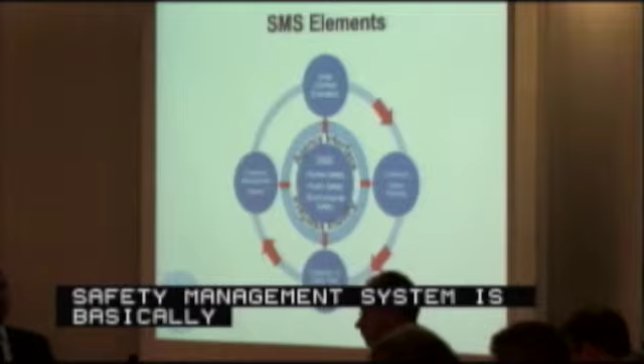The safety management system that we employ is basically a four-pronged approach in which we initiate the work at the contract evaluation stage, and we take it all through the life cycle, where we are continuously interfacing with the various elements.

The first one, contract evaluation: here we're looking at the contract plans to make sure that the safety functions - worker, public, and environment - are all covered, and we are reviewing that. We evaluate each plan, and then work is only started upon the acceptance of the plan provided. We have meetings with the contractor prior to that, review their plans, and we are proceeding only after that has been done.

The compliance criteria that we have in place is dictated by OSHA, EPA. We're looking at New York City DOT, New York City DEP, Buildings, Department of Sanitation, Fire, and New York State DEC. All of this is looked at as part of the safety compliance of the contractor.

The contractors normally have a plan to train. They have toolbox talks, safety committee development, the safety standards, and safety stand-downs in which they actually stop work and talk to their workers every so often. We've now instituted that they have to all do it rather than do it in reaction to an incident. In the past, they've done it reactively to an incident; now they're doing it continuously.

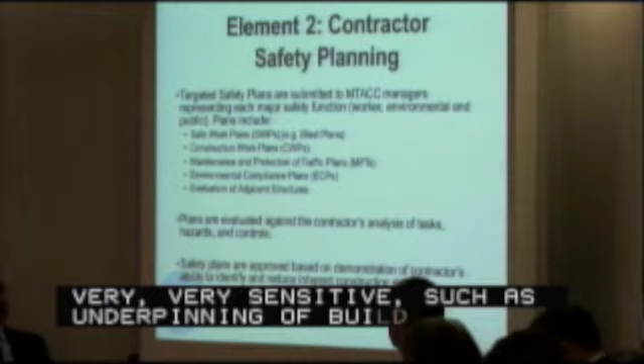We look at the maintenance and protection of traffic, because this is in the middle of the street and we need to make sure that the public is protected. We look at environmental compliance - air, noise, quality - and then evaluation of adjacent structures.

Particularly, we had to do that on 2nd Avenue, where in the first phase we had about 225 buildings that we actually needed to protect. These plans are evaluated against the contractor's tasks, and last but not least, we approve the plans before they proceed, making sure we identify various activities that will reduce the risks.

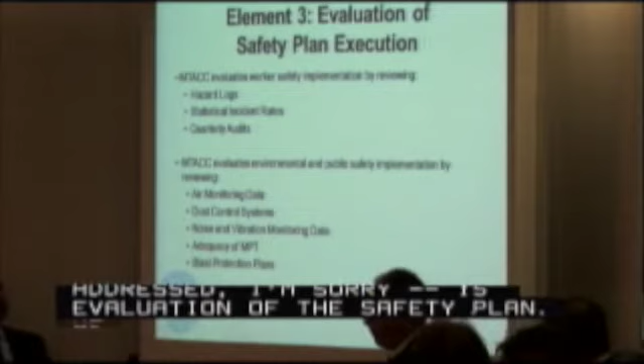The third item that needs to be addressed is the evaluation of the safety plan. Here we look at the execution, evaluating worker safety implementation, looking at hazard logs and statistical incident rates. We do quarterly audits, and above all we monitor air quality, dust control systems, vibrations, and the adequacy of the maintenance and protection of traffic.

The fourth element is contractor management. We review and evaluate their operation, and provide feedback to construction management personnel in order to effect change. A lot of it has to do with feedback from lessons learned. This is one of the first times we built in such a dense urban area, and we needed to be able to do that. Here's an example.

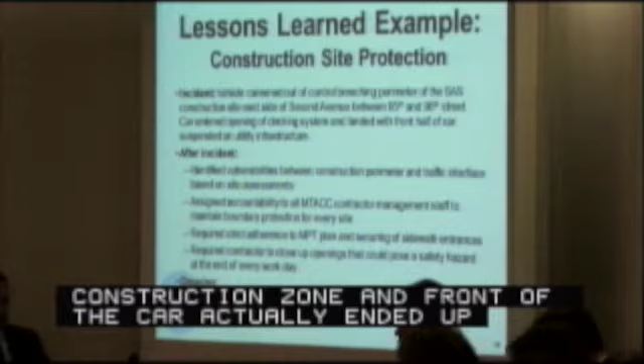Last summer we had a vehicle that was hit by another vehicle and pushed through our construction zone. The front of the car ended up suspended in an opening that was left uncovered by the contractor. The MPT protection area is such that it will not prevent a car from actually striking through many times, so it's very important that any openings are covered.

We identified vulnerabilities after the incident and made the required changes in order to adhere to the MPT plan. So that's something we're doing continuously, to make sure we learn from incidents that happen so they will not repeat themselves.

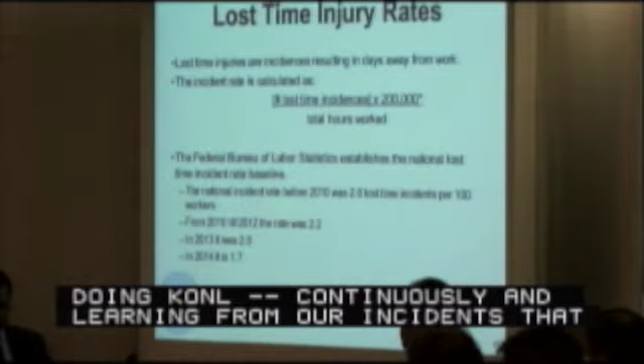One of the things we do is monitor lost time injury rates constantly. Before 2010 the national number was 2.5, 2.6. It went to 2.2, then in '13 to 2.0, and in 2014 it's now been lowered to 1.7.

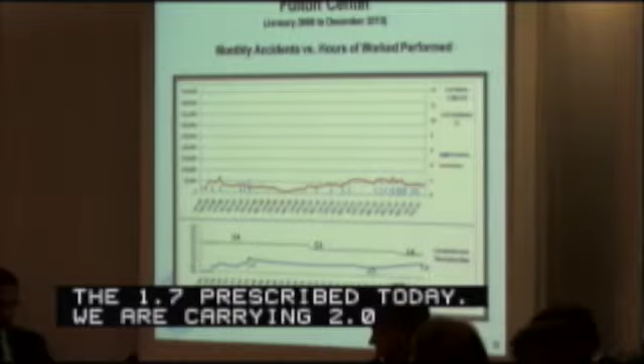Last but not least is Fulton Center, which is really low at 1.13, and that was throughout low. I want to make sure everyone understands this is a different type of construction — building construction versus the heavy civil construction we have for the others. That's also the reason for such low numbers, although they were very careful to monitor it.

That's about it. Any questions?

If I remember correctly, two years ago we had a major safety issue regarding a blasting situation on a contracting job. What rules were violated in that context, and what consequences took place as a result? The answer is all the rules were violated — there was not one rule that the contractor didn't violate. They went over everything they should have done.

This is the blast that happened at the northwest corner of 2nd Avenue and 72nd Street, where we were building an ancillary building. There was a blast that was supposed to be controlled, but it ended up being an explosion rather than a blast. We did an analysis at the time to understand exactly what happened, and we put in place stringent rules for that not to reoccur.

Not that we didn't have rules before, but the problem was the contractor took it upon themselves to go ahead and do something without the approval of the CM. The CM did not get involved to make sure that happened, and above all, the people charged with oversight from the fire department just did not react to that either. So the three things together resulted in what happened, and it shouldn't have happened.

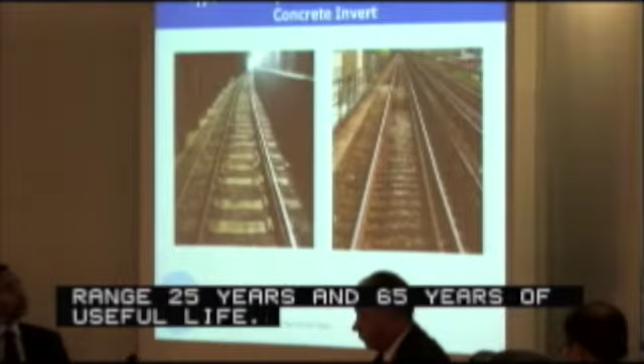The next 7 slides are pictures of the various types of track within the New York City Transit system. There are approximately 90 miles of Type 1 ballasted track. There are 193 miles of Type 2 short tie blocks embedded in concrete invert track.

There are approximately 175 miles of Type 2 modified, or Type 2M, short tie blocks and long ties embedded in concrete invert. There are 167 miles of Type 3 elevated track.

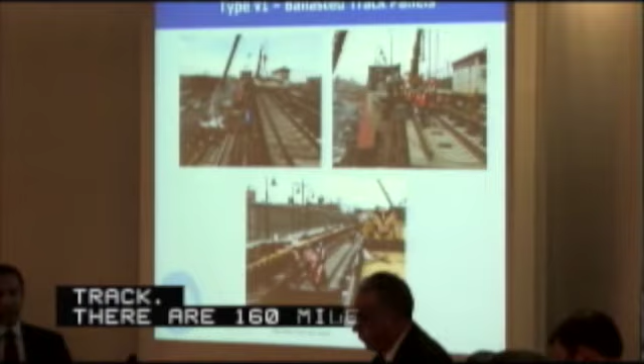There are 160 miles of Type 6 ballasted track, which you'll find in the open cut sections like the Dyer line. There are 13 miles of Type 7 track, which is long ties resting in ballast used primarily in our yards. And there are 19 miles of Type 8M direct fixation track.

We have a comprehensive track and switch renewal program that is carried out using a dedicated in-house construction workforce who does the majority of our track work. One of the main benefits of using in-house forces is flexibility. Flexibility enables us to change locations based on track access availability. We are able to deploy workforces to gain efficiencies and productivity. In addition, we have our own on-site track and switch fabrication facility at Linden Yard in Brooklyn, New York.

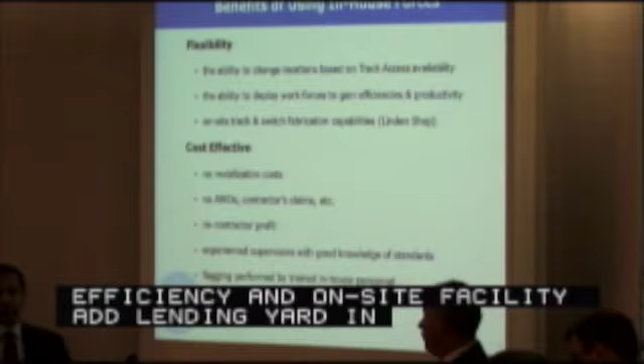Another benefit of using in-house forces is for cost effectiveness. There are no mobilization costs, AWOs, contractors' claims, or profit attained from the contractor. The in-house forces include experienced supervisors and managers with thorough knowledge of New York City Transit standards. In addition, flagging associated with the in-house capital work is performed by our own MOW trained personnel.

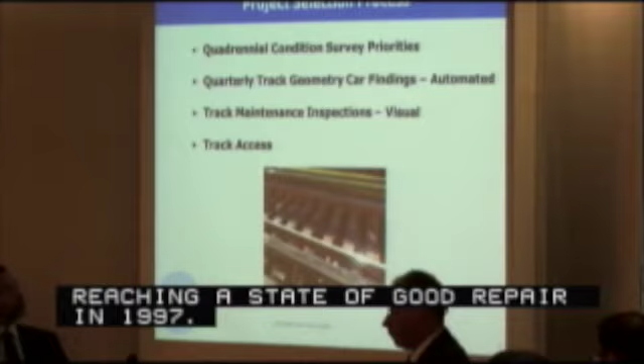Next slide. No, go back. Thank you.

The project selection process for the capital track and switch programs is based on the findings of the condition survey, track geometry car, visual inspections, and track access availability. The quadrennial condition survey is performed on mainline and yard tracks and switches. The purpose of this survey is to categorize track assets by their remaining useful life.

The quarterly track geometry car findings provide information on the track geometry, rail wear and flangeway width, rail flaws, thermal imaging, and video inspection. Both surveys and geometry car inspections are performed by our Track Engineering division.

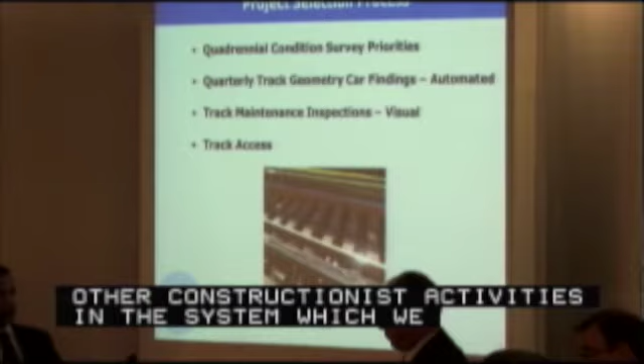Visual track maintenance inspection is performed by our in-house maintenance forces, by crews who walk and inspect the tracks on a system-wide basis twice a week on non-consecutive days. As for track access, we seek opportunities to coordinate our program with other planned construction activities in the system, known as piggybacking. The benefit of coordinating work results in cost efficiencies as well as minimizing customer inconvenience.

Could I ask how many track geometry cars Transit has? We have four.

And are they kept at different yards or all at the same yard? The oldest one is at... that's classified information. We keep them throughout the system.

The production levels for the 2010 to 2014 capital program include approximately 56 miles of mainline track, 126 mainline switches, yard work, and approximately 8 miles of continuous welded rail.

2014 is the final year of the current capital program. The 2014 capital program consists of 14 projects addressing approximately 7 miles of track reconstruction and 15 switches on the main line, approximately 2.5 miles of continuous welded rail, yard switches, with a revised budget of $207.9 million.

The cost estimates are provided by the Track Engineering Division, and to conform with standard procedures and ensure cost competitiveness, an independent engineering estimate is also performed. The estimate includes support costs such as diversions or general orders, work trains, and supplemental bus service.

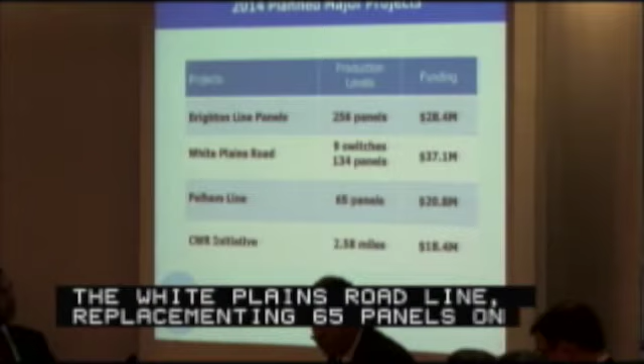Of the 14 projects planned in 2014, 4 of the largest projects are represented on this chart. They are the replacement of 256 panels on the Brighton line, replacement of 9 switches and 134 panels on the White Plains Road line, replacement of 65 panels on the Pelham line, and the installation of approximately 2.6 miles of continuous welded rail. These projects account for approximately $104.7 million, or half of the 2014 program budget.

You will note that for the 2015 to 2019 program, we proposed a CWR initiative program in order to address the high number of rail breaks. This will be discussed on the next slide.

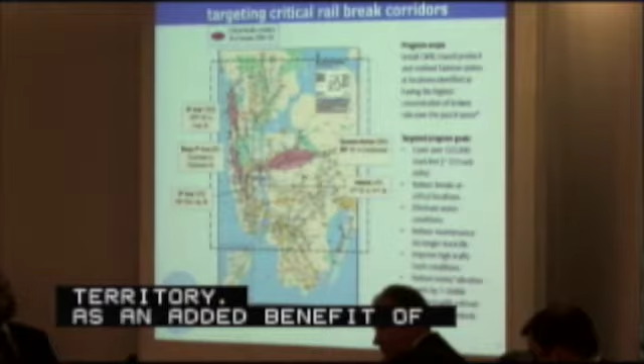We have proposed an increased CWR program. CWR has the lowest frequency of rail breaks per mile. Installation of CWR will significantly reduce joint failures found in bolted rail territory or bolt hole cracks. An added benefit of CWR is that it lowers noise and vibration levels. The installation of CWR and resilient fasteners also provides for a longer track life and reduction of stresses in the track structure.

The scope of the CWR initiative addresses critical corridors identified by Track Engineering, where the concentration of in-service rail breaks is highest, including the 8th Avenue corridor, Broadway 7th Avenue, 6th Avenue, Queens Archer, and the Astoria line.

Just as a note, CWR cannot be used on the structure due to the varying expansion and contraction differences of the actual rail and the structure itself. So on open deck structures, we do not use CWR.

As part of our new strategies, we have implemented a Scheduled Component Renewal Project, or SCRP. SCRP is a cost-effective approach utilized for track renewal in the subway and elevated track areas where fasteners and rails are failing. In most cases, the concrete and the cross ties still have years of remaining useful life.

The costs associated with the SCRP initiative are approximately 1/3 to 1/2 the cost associated with doing Type 2 or Type 3 reconstruction.

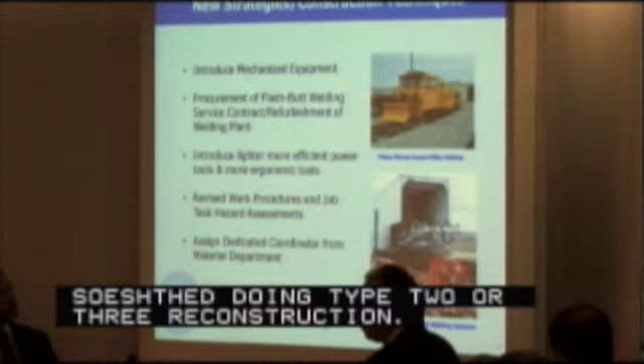To aid in our efforts in achieving our goals, we are exploring new strategies and construction techniques, such as the introduction of mechanized equipment to assist employees handling heavy materials, for example, a knuckle boom crane mounted onto a work train flat car, and a prime mover super utility vehicle.

We are in the process of exploring procuring a flash butt welding service contract, in addition to refurbishing the welding plant at Linden Yard in Brooklyn.

We are introducing lighter, more efficient power tools and more ergonomic type tools for our employees. We have revised work procedures and job task hazard assessments. In addition, the Material Department has assigned a dedicated coordinator to the Track Division to facilitate the material and procurement process.

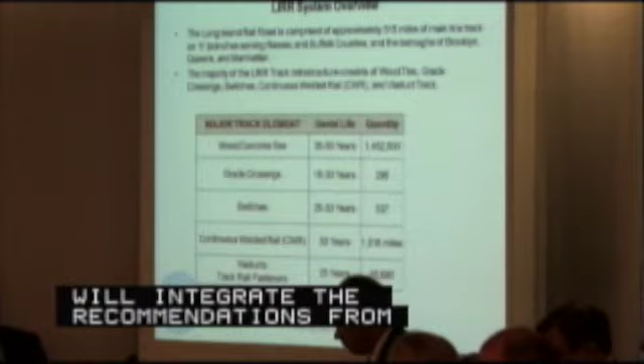Since its inception, the MTA capital program has made a $1.26 billion investment in Long Island Railroad's track program. This includes $51 million budgeted in our current 2014 annual track program.

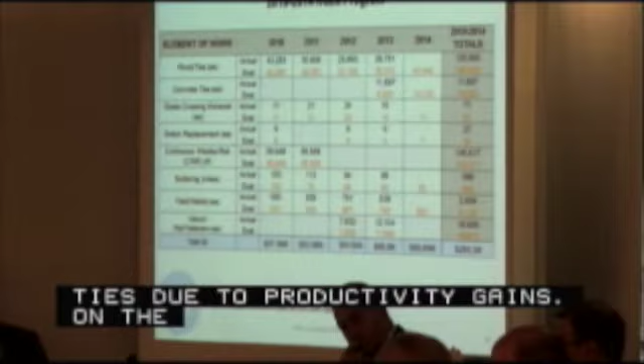Concrete ties: in 2013, we were able to install twice the amount of concrete ties due to productivity gains and available outages. On the CWR, continuous welded rail, the program goals for replacement of continuous welded rail we completed in the first 2 years of our program.

We are planning to replace another 160,000 linear feet, or roughly 30 miles, of CWR planned for in our 2015 to 2019 capital program. Over 95% of our track is CWR.

Field welds: each year we try to increase the goals for field welds in efforts to reduce the amount of bolted rail connections that we have. The viaduct rail fasteners: we also completed replacement of the original direct fixation rail fasteners on the Babylon Branch viaduct.

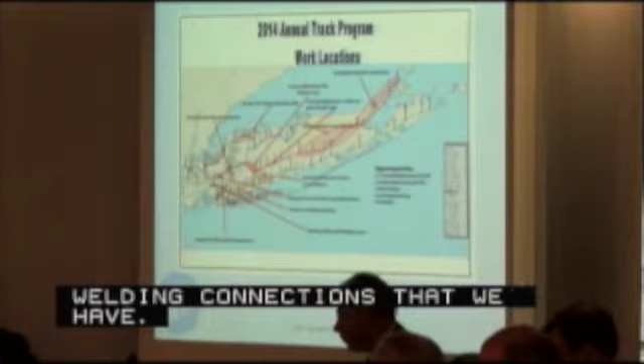Available track outages and contact time to do this work is carefully planned through our track outage program. Every effort is made to maximize the amount of work that can be done within an outage by piggybacking projects and consolidating work. When doing tie replacement on specific branches, we will also try to replace scheduled grade crossings, field welds, rail grinding, as well as replacement of track systems such as third rail, signal, and communications.

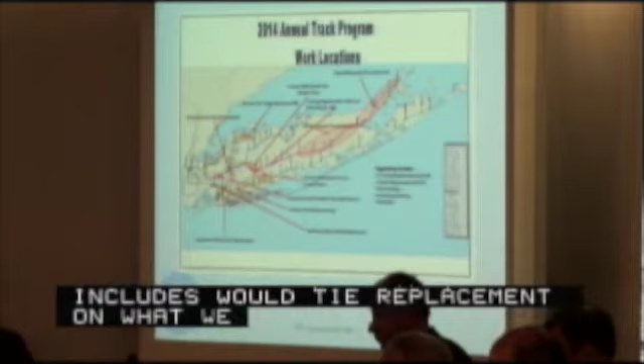The outages required to meet the goals shown for 2014 are illustrated on this system map, which includes wood tie replacement on what we call mechanized tie replacement, taking place between Ronkonkoma and Greenport on the Central Branch and between Divide and Farmingdale. Concrete tie installation will take place between Locust Manor and Oyster Bay, the Hempstead Branch, and other isolated locations.

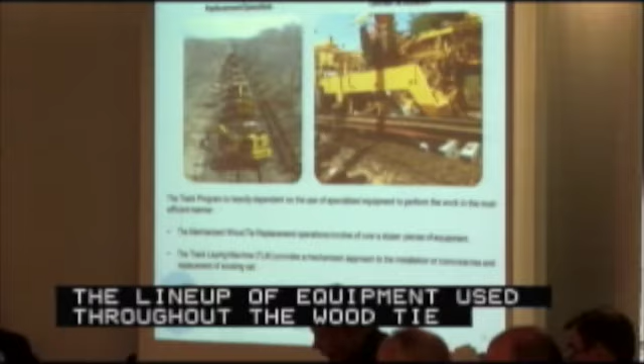The photo on your left represents the lineup of equipment used during our mechanized wood tie replacement operation, which involves over a dozen pieces of equipment. On the right is our track laying machine, which provides a mechanized approach to the installation of concrete ties and the replacement of existing rail.

Long Island Railroad has also used third-party supplied equipment such as shoulder ballast cleaners, rail ballast vacuums, and rail grinding machines when it's proven to be more efficient to do so.

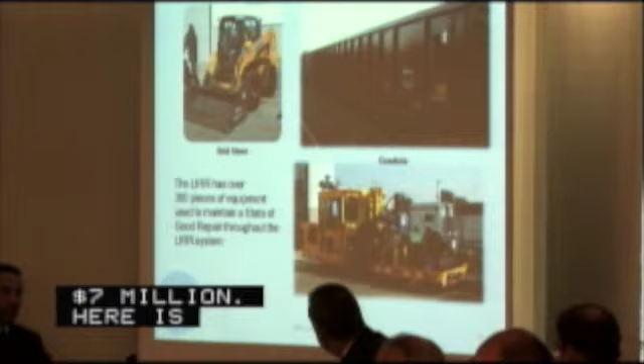The 2010-2014 track program also included the purchase of new equipment valued at $7 million. Here is some of the equipment recently purchased: skid steer, gondola, spiker. The railroad now has over 300 pieces of equipment used to maintain a state of good repair throughout our Long Island Railroad system.

What does a spiker do? It spikes. It spikes. It spikes, right. Drives spikes into the wood ties. Okay. Right.

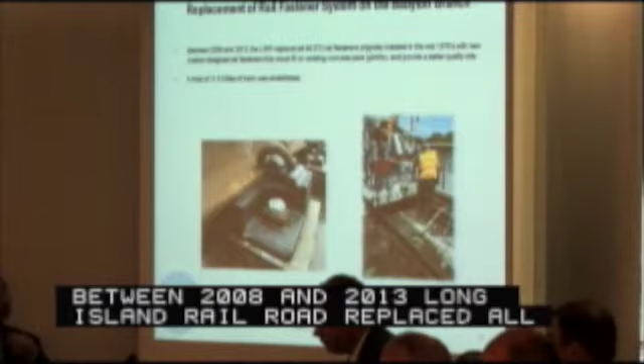Between 2008 and 2013, the Long Island Railroad replaced all 48,572 rail fasteners originally installed in the mid-1920s on the Babylon Branch Viaduct. The new rail fasteners were custom designed to fit onto the existing concrete pads. This eliminated the need for deck modifications while providing a better quality ride, improved electrical isolation, and adjusted the spring rate to lessen the impact of heavier equipment axles on our viaduct. A total of 11.5 miles of track was rehabilitated.

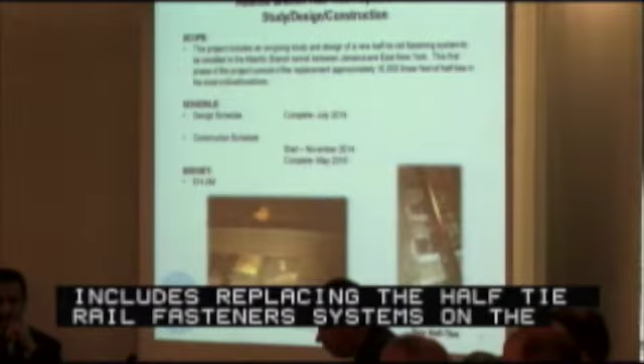Another state-of-the-art project includes the replacement of the existing half-tie rail fastener systems on the Atlantic Branch tunnel between Jamaica and East New York. The existing system will be replaced with a composite half-tie system that will allow the concrete substrate and drainage troughs to remain. The new composite tie is expected to have an increased useful life due to its resiliency against water and changes in temperature. The first phase is scheduled to start in November of this year, consisting of approximately 10,000 linear feet of half ties in the most critical locations, with completion scheduled for May 2016.

And that concludes our presentation.

Development of an enhanced track surfacing program is underway. 2 additional crews will be added to our surfacing program, and an enhanced joint elimination program has added 1 additional crew to eliminate joints by welding. The latest technology for detecting internal defects within the rail will be used by our contractor, Sperry Rail, who perform this measurement twice annually.

A complete reorganization of the track department includes several significant changes in oversight and management, such as track geometry being performed quarterly. TTCI will be performing 2 of these measurements in 2014. We are exploring the use of autonomous track geometry, where track geometry measuring equipment is added to the revenue fleet, and track conditions are constantly monitored. New technologies and automated inspection of joint bars, ties, and fasteners are also being explored and will be tested in 2014 by companies including Georgetown Rail and Sperry.

A manager will be dedicated to the oversight and data management of all the electronic information we'll be collecting. This information will be the basis for development of future track programs.

A quality assurance function for track inspections and the construction and maintenance of track is being developed, ensuring compliance to FRA and Metro-North standards.

Development will begin this year of a comprehensive track asset database to include electronic track inspections, trouble reporting, documentation of incidents, and corrective actions being implemented.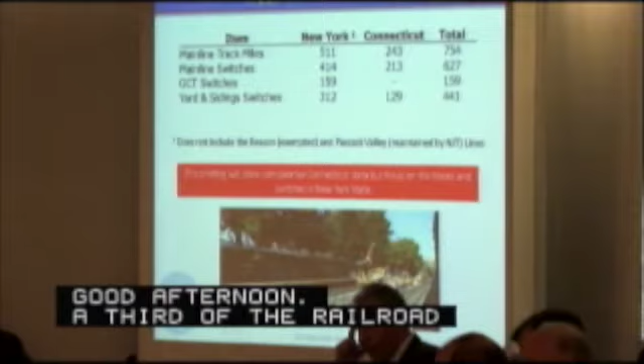I'll start by mentioning that about one-third of our railroad lies in Connecticut. Though this briefing is about our program in New York, I will occasionally mention Connecticut for comparative purposes. If you look at the chart, approximately one-third of our trackage is in Connecticut, two-thirds in New York. This does not include the exempted Beacon line. Beacon means we run no service there right now — it's basically a mothballed line.

Next slide. Our rail track values are the same as those of Long Island Railroad and New York City Transit. I'd like to point out, on the ballasted track for concrete ties, we — MBTA and Amtrak — did go in and buy some ties from a company called Rocla about 10 years ago. The ties had some manufacturing defects and they're failing on us now. We're replacing them under a special court deal with the company.

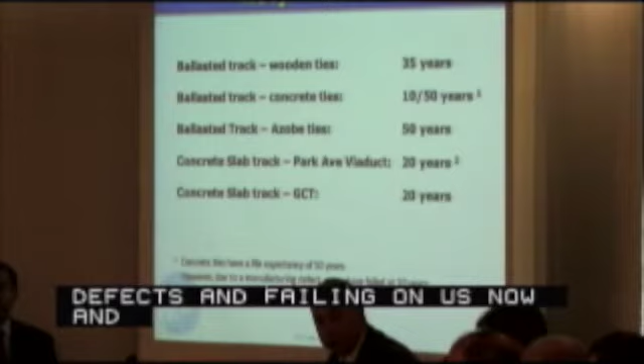Otherwise, the concrete tie track is designated to last for 50 years. On the concrete slab track on Park Avenue Viaduct, the viaduct itself is good for 100 years. The mounting system is also very robust, but the grouting system underneath, which levels out the rails, is experiencing some problems right now. We're working with the manufacturer to come up with a better grouting system, and that's what holds the time frame down to 20 years. Next slide.

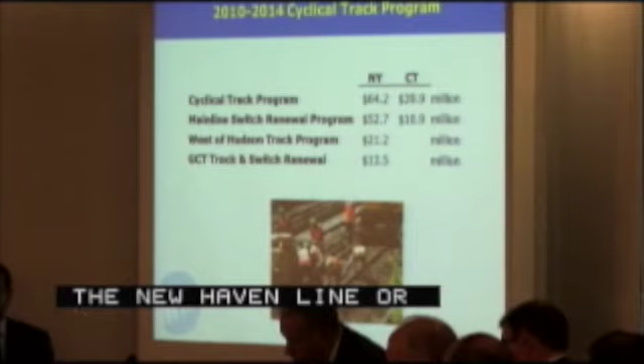Going back to one-third track in Connecticut and two-thirds track — I'm sorry, one-third track in Connecticut, two-thirds track in New York — is that just the New Haven line or is that all of Metro-North? That's in Connecticut. It's the New Haven line in Connecticut, sir, counting all the branches. And then for the rest of Metro-North, is all the rest of Metro-North, to include West of Hudson? Okay, so in total, one-third in Connecticut, two-thirds in New York. Yes, approximately. Thank you.

These figures indicate how much we have spent so far in this capital program and are going to spend this year. The breakdown is on the left-hand side: in New York, 75%, 25% in Connecticut, for a total of $200 million.

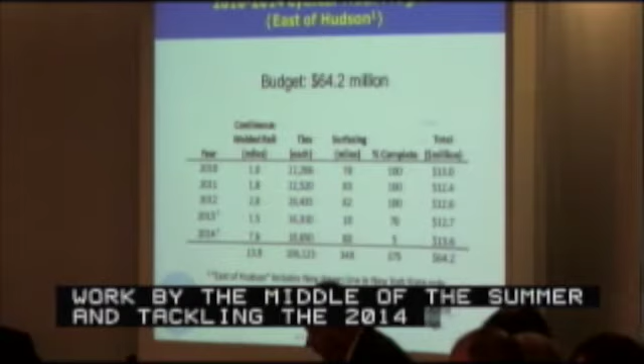Next slide. On this slide, please note that we include the New Haven line in New York State only; I will show you New Haven line data on a Connecticut slide on the following slide. The 2013 program execution was delayed by our response actions to several incidents and to our addressing of drainage issues last year. We are going to complete the 2013 work by the middle of this summer, and then we will tackle the 2014 program in late summer and fall of this year, weather dependent. So you notice the 70% in the percent-complete column — that's as far as we got from 2013 before we switched our focus. Next slide.

Looking closer at this year, 2014, we're looking at the cyclical track program. Excuse me — looking at Connecticut over here, this slide presents Connecticut data.

Connecticut projects in the program this year are one to two years out. Connecticut funds their program approximately one year at a time, during the year of execution. What happened in 2013 is that we diverted some of our forces working in Connecticut down to the problems they were having with drainage issues and construction at CP 109 in the Bronx — I'll cover those later in this briefing. That means we only completed 48% of our projects in Connecticut. This year we will catch up in Connecticut, completing the 2013 work and then the 2014 work. As of right now, half of the Connecticut program is funded for this year, and we expect the rest of the funding to show up later this year.

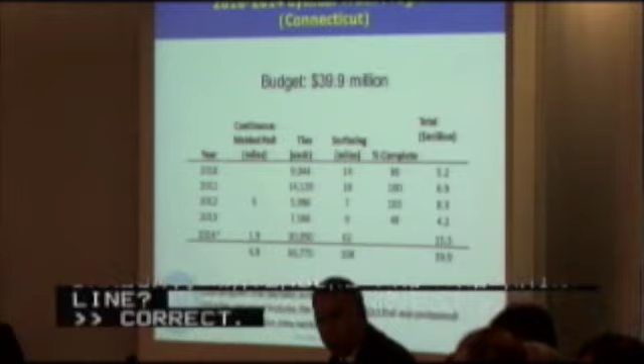Could I just ask — when you're referring to Connecticut, are you referring to the Danbury branch, the Waterbury branch, the New Canaan branch, and the main line to New Haven? Correct, from the Connecticut-New York border east. Okay, correct. Thanks. Next slide.

Looking at the cyclical track program specifically, though the weather has not been very cooperative, we were able to get a little bit of rail put in during the nice weather we had this past month, last January. It equates to about 0.8 miles of rail that was in bad shape, and we were able to replace that. Otherwise, we're replacing 7.6 miles this year, and in Connecticut another 1.9, for a total of 9.5 miles of continuous welded rail to go into our track structure this year.

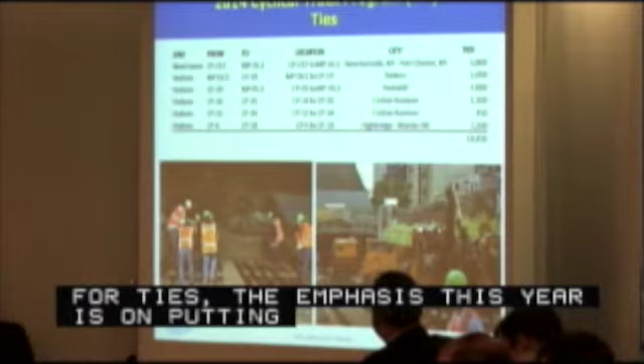Looking at the cyclical track program for ties, the emphasis this year, as you notice from the Connecticut slide, is going to be on putting ties into Connecticut. We're putting in 30,000 ties in Connecticut, so New York is a little bit on the lighter side. Having said that, in New York the primary emphasis is going to be on the Hudson line for our tie program. That's the one that got really hit by Hurricane Sandy last year.

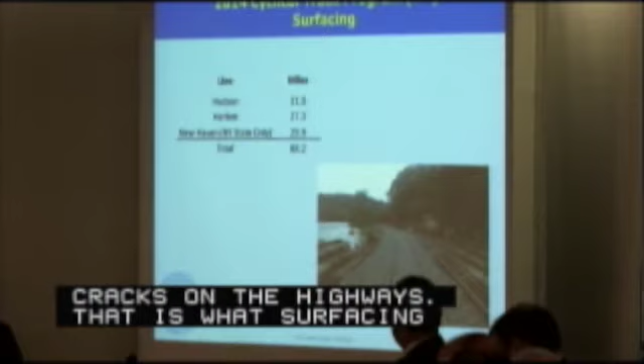Surfacing basically smooths out the track, and it also prolongs the longevity of our track. It's equivalent to fixing potholes and cracks out on a highway. When you go ahead and seal up the cracks, you get a smoother ride, and the road surface wears better and lasts longer. That's basically what surfacing does for our track. Our goal is to surface 120 miles per year. Here you see we're doing 88.2 miles in New York State. When added to Connecticut's 30 miles, that brings us up to 118.2 miles, just under the 120 that's our goal for the year.

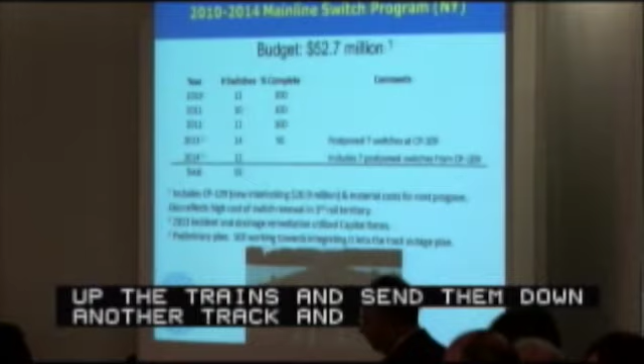For the switch program, please note that almost half of this budget is for CP 109. CP stands for Control Point. This is a brand new installation that we're putting in the Bronx, roughly around the Botanical Gardens. It is along a 6-mile stretch of trackage where we have no ability to have trains switch from one track to the other, so we're breaking that whole stretch into two halves, approximately equal in length, about 3 miles and 3 miles. It will do two things for us. It'll allow us to improve our on-time performance, because any trains that get stuck in this extremely busy section of Metro North right now force us to have to back trains up to the nearest control point and send them down another track. This will at least break that whole area down into two halves and allow us to bring on-time performance to a much better line than what it is right now.

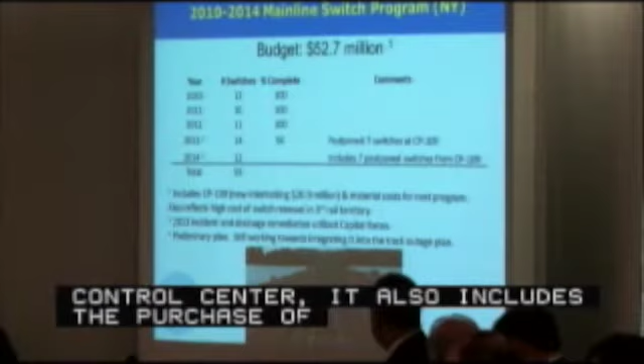The second thing that it allows us to do is, this is a very difficult location for us to do track maintenance on, because when we take out a piece of track here, we are taking out 6 miles of extremely crucial track. By putting in this control point, we'll be able to break it down into 2-3 mile segments and therefore decrease the amount of pain that we have when we do track maintenance. So having said that, approximately $22.7, $23 to $25 million of this project is to install that new control point. That includes all the signaling, the power distribution systems, and connecting to our control center. It also includes the purchase of materials for next year's track program. Now, next year's track program is the next capital budget from 2015 to 2019, but we're beginning to buy the items under this year's program.

The mainline switch program in comparison for Connecticut, as you can see, in 2014 we plan on putting in 12 turnouts. We have half of them funded right now on schedule. The other half we hope to have funded by the end of this year, so we can go ahead and actually put them in this year.

The mainline switch program for 2014 for New York State. You'll notice CP 109 has 7 turnouts right there. Last year we meant to put in all the turnouts in CP 109.

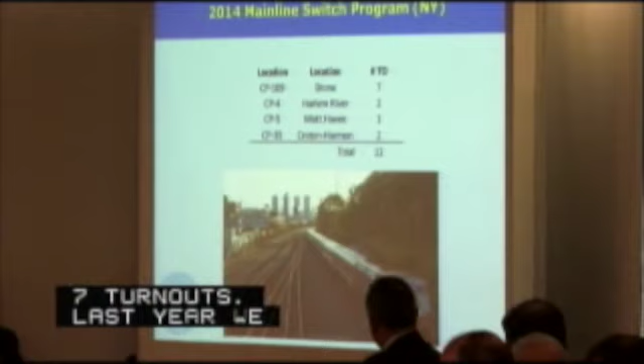However, once we began to put in that CP and looked at that whole stretch of track, we discovered we had a lot of drainage issues. We decided to focus on fixing those drainage issues first because they were causing us tremendous problems, so all the effort went there. We were only able to install 3 of the 10 turnouts in CP 109.

This year we plan on finishing up CP 109, weather and conditions permitting. CP4 and CP5 is an area that only has 3 turnouts in there, which also includes a lot of ancillary track work.

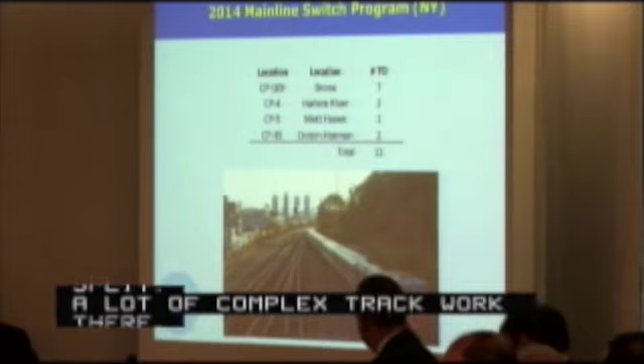This is Mott Haven in the Bronx, where our Hudson Line and Harlem Line split, an extremely busy junction on our railroad with a lot of complex track work. The photograph shows a portion of the Mott Haven interlocking, and we'll be devoting our primary focus there, then move on to CP 109.

For West of Hudson, we perform all of our program work in the fall of each year. New Jersey Transit performs this work for us under contract, but for all track work, turnout work, or switch work, we do our own in-house work.

In 2011, we did not do well because Hurricane Irene hit. The top right photograph shows part of the aftermath. We then devoted the rest of that year and the beginning of the following year to reconstruct our main line, which was completely severed for approximately 14 miles. So we completely rebuilt that.

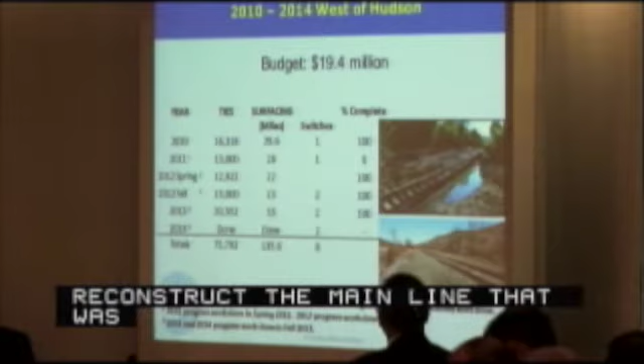However, we wanted to get back into our program, so in 2012 we went ahead and knocked out the 2011 program we were supposed to have done when the hurricane hit. Then in the fall of 2012, we went ahead and did the 2012 program.

Based on the fact that we were able to knock out 2 years' worth of work, we worked with NJ Transit this year, and they were able to really bolster their forces together with ours, so we were able to knock out the 2013 and 2014 program in the fall of this year.

The only remaining work on the West of Hudson program right now is to install 2 turnouts, which we will do on Metro-North with Metro-North forces later this year.

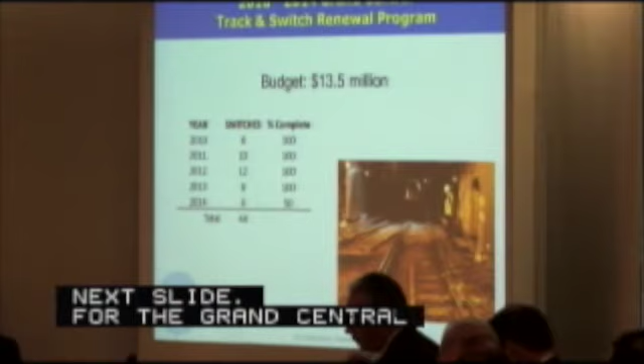For the Grand Central Terminal switch program, we're on track to replacing these turnouts. We're on approximately a 4-year cycle, a 4-program cycle, so every 20 years we wind up replacing almost all of our turnouts. We replace them much more frequently than on the main line, primarily because Grand Central sees the most traffic of anywhere else on our railroad.

Grand Central Terminal has extremely sharp curves, which causes the trains to exert tremendous lateral forces on the track structure, further breaking down our turnouts, which just basically take a lot of wear and tear.

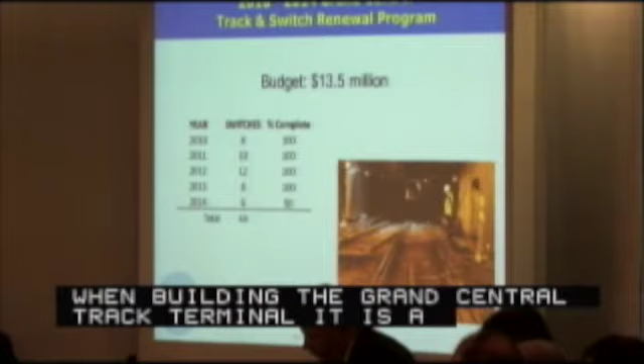The other problem here is that when the New York Central Railroad built Grand Central Terminal, they built track with very specialized, non-standard sizes, with very specialized crossings and everything else. These have long lead times because they're all custom built and custom made. But we're on track to replacing 44 of those track components for this next program.

Our goals and project selection process look at expected life versus actual conditions. I won't go into a lot of detail because Bob Puslowski gave a tremendous overview of what we're doing right now. Just to piggyback on what we said about track geometry cars, the track geometry vehicle determines the position, curvature, and alignment of the track.

It goes down and sees exactly whether the track is as straight or as curved as it's supposed to be. It also checks the smoothness and cross level of the track, to tell whether we're bouncing down the track as we go, yes or no.

It also checks our overhead catenary system, the overhead wires which carry the current on the New Haven Line, to make sure it's at the correct height and the wires are properly staggered as you go down the track, to minimize wear and tear on the pans up above. That's the type of information we're getting from track geometry findings. Bob also mentioned the TTCI, the Transportation Technology Center's track loading vehicle.

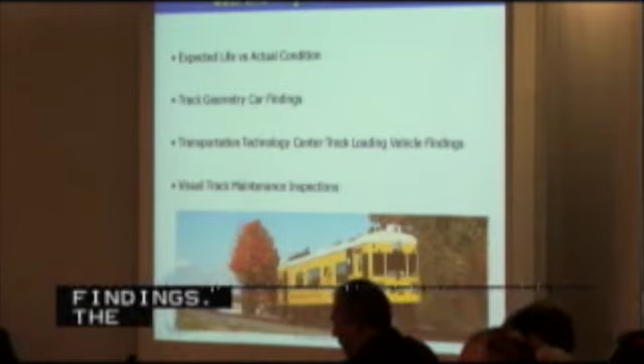This vehicle exerts special force on the track to replicate the forces of either a heavy freight train, including not just the vertical but lateral forces, or extremely fast passenger trains like the Acela Express operating on our New Haven line, Amtrak's Acela. We can replicate those forces with this fully instrumented vehicle and see how our track structure responds, giving us a much better idea of what our track is really capable of handling and where the problem areas may be.

Also on Sperry rail service, you see a photograph of a Sperry rail car. This is the technology that lets us look inside the rail to see any flaws that normally would never be detected by the naked eye or any other technology. It helps us determine where there might be a rail break coming up so we can cut it out and replace it before it happens.

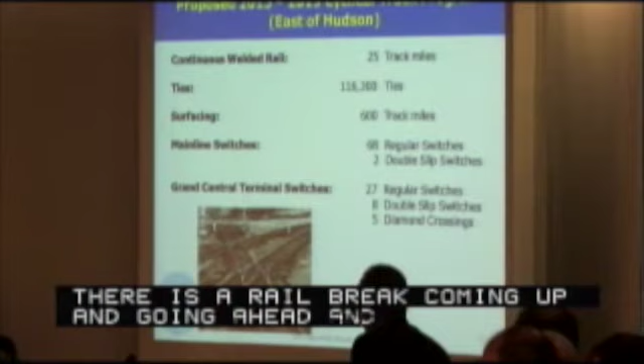The 2015-2019 cyclical track program, I'll show Connecticut on the next slide. This is for east of Hudson only. I also have a Connecticut slide and a west of Hudson slide. For the ties, that comes out to about 25,000 ties per year, which will bring us to a state of good repair. Same with the welded rail, surfacing comes out to about 120 miles per year.

The photograph in the bottom left corner is a double slip switch. I mentioned it a couple of times on the slide, just wanted to show you what it's like. It's a very complex switch, has to be aligned in 4 different directions. This particular photograph shows the 2 switches we have to replace in Croton Harmon, New York at CP control point 35.

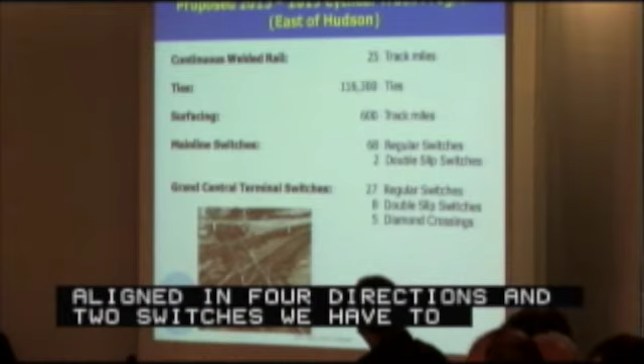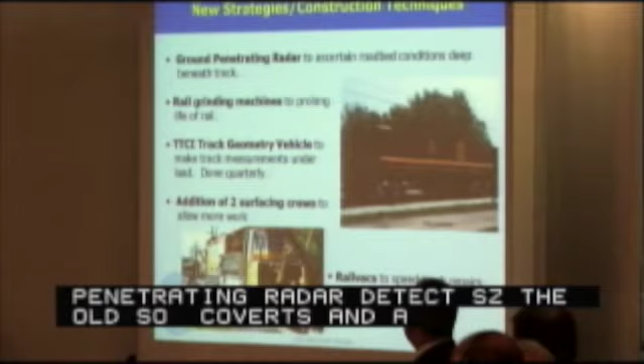For new strategies and construction techniques, one more time to piggyback off what Bob said, an excellent presentation. The ground penetrating radar lets us detect old culverts that may have been covered over the years but which are a point of failure underneath our main line that no one ever knew was there. These radars also help us find underground streams, irregular rock and ground formations, and so forth, helping us put together a much better program for smooth track.

Rail grinding machines, we're bringing those in. What happens when trains stop and go is it causes corrugations on the top surface of the rail - it looks like a cardboard box that's corrugated, that's what the rail begins to look like. Grinding smooths that out, which does 2 things for us: it gives passengers a much smoother ride, and it helps our equipment last longer, both our rail car wheels and the rail itself, because we restore the profile of the rail. Nice and smooth rail lasts longer - that's what rail grinding does for us.

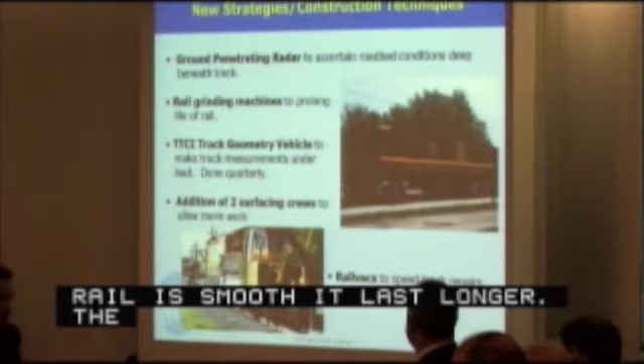I mentioned the track geometry vehicle and the 2 surfacing crews - to piggyback off what Bob said, we will now have 1 crew dedicated to each of our east of Hudson lines, plus 1 additional crew which will go wherever our problem areas are. We can use them for spot surfacing, and also for all of our control points because they get additional wear and tear from the switches, so that's where we'll tamp and surface more.

A quick question - this says the track geometry vehicle is operated quarterly. If you have a prolonged period of snow on the ground, I assume it's done once the snow is gone? Or can it be done with snow?

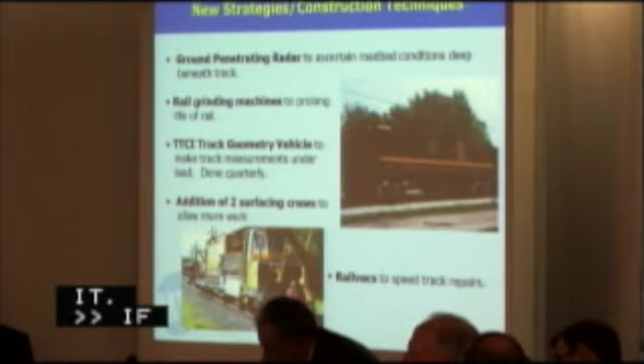Snow typically prohibits it - if the snow is above the rails, you're not going to do track geometry. If it's at or below the rails, you can do the measurements. So if it's scheduled and there's snow, it's done as soon after the snow is gone as you can, it typically doesn't wait for the next quarter. Absolutely not. Typically it'll be about March, then somewhere in June or July, then September, October, and then December for the last run of the year.

And finally, we have our rail vacs. You see a photograph of it in the bottom left corner. It's a humongous vacuum cleaner. When it comes to excavating around the track, why dig it out? We can just suck it out. It's a phenomenal machine. We use these.

That concludes my presentation. I'd like to open it up for any questions.

A couple of general comments before we open it up to questions. I think what you've seen from each one of the three agencies is an excellent presentation on their approach to cyclical track replacement on the capital program side. On any of the agencies, one of the largest cost drivers is capital track. What you've seen, and we didn't hear it specifically from Metro North, but we did from Long Island and New York City Transit, is moving from what at the front end of the program in the 80s was called out-of-face reconstruction of track, where we did everything and reconstructed and changed from one type to another at large dollar values, toward what you could call the initial elements of whole life asset management, where you're only replacing those elements that have reached the end of their useful life, using discretion with respect to the expenditure of those dollars. The New York City Transit program can range anywhere from $240 to over $300 million a year, so those are resources we've got to husband very carefully. So I've asked all the organizations to make sure that as they move forward, going from what started as crude condition surveys and assessments and 20-year needs, to move toward whole life asset management, where we have much finer detailed information to make these decisions by, because the programs keep getting larger, the competition for resources keeps getting more difficult, and we've got to make sure that this particular asset is well covered off.

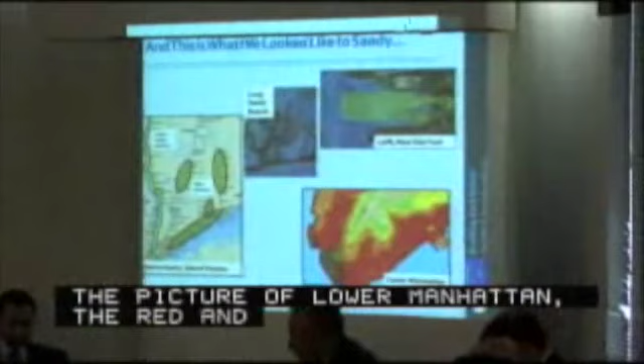So I think you've all seen this picture before. I just wanted to bring it up because it reminds us of the magnitude of the storm that hit our region in October of 2012. Here we have some images of where the damage occurred. The picture of Lower Manhattan, the red and orange, shows where there was flooding during Sandy. The two Long Island Railroad pictures show flooding in the areas that are in blue. And in the Metro North territory, there was flooding along 30 miles of the Hudson Line and wind damage in other parts of the system.

Water entered the system through anywhere that there was an entry. There are thousands of openings to the subway system, just 600 in Lower Manhattan alone. They're the same types of openings to the East River tunnels used by Long Island Railroad. Water entered the system into yards and vehicular tunnels directly from the storm surge, whether from Coney Island Creek, Hudson River, the East River, Newtown Creek, or other areas. Track at grade and low-lying areas also flooded, such as the Hudson Line and the Long Beach branch.

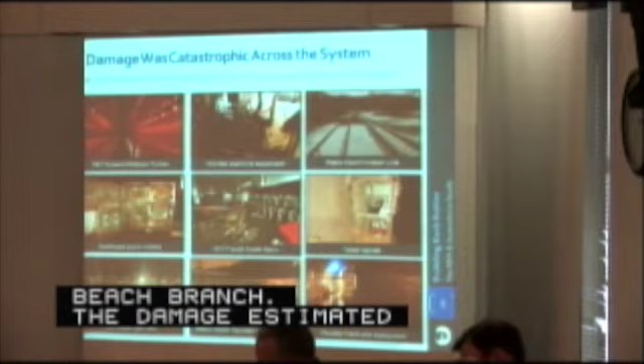Overall, the damage is estimated at close to $5 billion. That's the amount included in the plan amendment that was passed in January. 130 million gallons of salt water were pumped from tunnels across the MTA system.

Damage included 9 subway tubes, 2 vehicular tunnels, 2 of the East River tunnels used by Long Island Railroad, and yards, low-lying areas, including stations throughout the system. Anywhere that water came into the system, this was brackish salt water that causes corrosion, and this corrosion continues until permanent repairs are made.

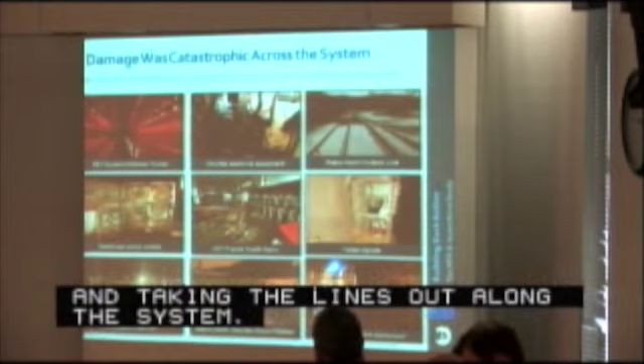There was also wind damage throughout the system, canopies and roofs to outdoor stations, and trees fell across the track, taking out catenary throughout portions of Metro North and Long Island Railroad territory. Most of the damage occurred in concentrated areas where assets were already in a state of good repair, so we are replacing many assets prematurely.

As we move forward with the recovery, our primary goal is to minimize the impact of our recovery work on the system, our customers, and also the regional economy. Figuring out how to do this includes many steps that involve multiple departments at each agency.

The work began with the initial damage assessment done shortly after the storm, and that was the first step to understanding our repair needs. But the damage assessment really is an iterative process, and staff at each agency are conducting more frequent inspections and monitoring changes in asset performance to help us understand where there may be latent damage, which would affect the work that we need to do.

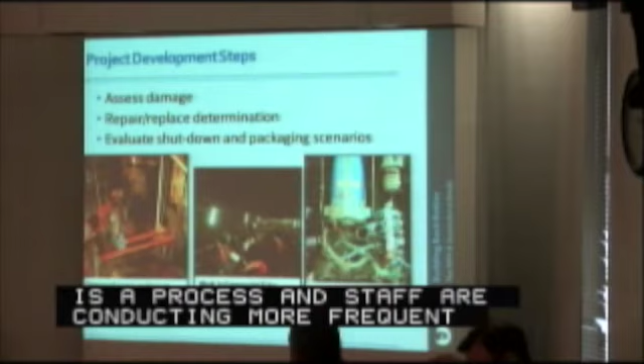So the first step in identifying the projects is to determine which assets need to be repaired and which can be replaced, and then identify which assets should be addressed together as part of a package. Part of this work involves evaluating the costs of different packaging scenarios.

Once we have the project scoped together, a contractor access plan needs to be developed, and that involves a detailed analysis of ridership patterns, available alternate service, and capacity constraints. So are outages needed? Can outages occur just on nights and weekends, or is full-time outage needed, as we have now on the Montague Tube?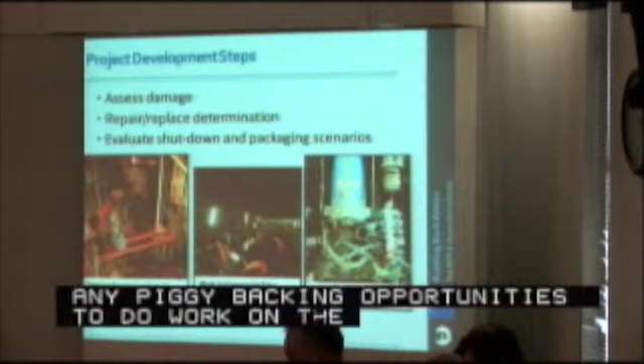We also estimate the cost of these different shutdown scenarios in making that determination, and also see if there are any piggybacking opportunities to do work on outages that were already planned. We're currently doing work for Sandy-related repairs in the Steinway Tube using outages that were previously planned for CBTC installation.

So as you can see, we have a huge portfolio of work underway. This slide shows some summary information. We have almost $800 million in contracts that have been awarded. That includes design, planning, scoping, and also construction.

The work at TBTA is progressing using FEMA funds. The other MTA agencies will be funded by the FTA. In both cases, we're using our own money to advance projects once we are reasonably certain that we'll be reimbursed by the feds. And we're only advancing those projects that fit into the current funding envelope that we have. The Sandy relief bill that provided money to the FTA and some of the funds for FEMA included a requirement that agencies establish a monitoring process.

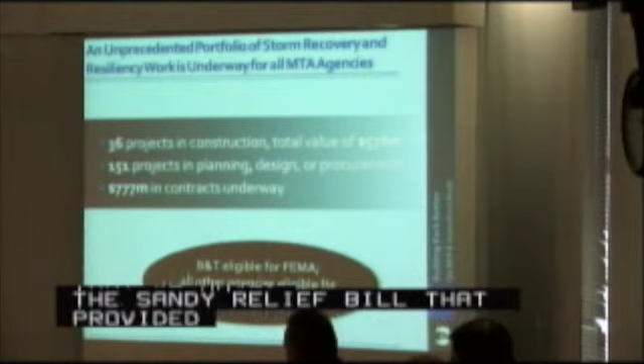To that end, MTA Audit and the MTA IG have dedicated staff to monitoring our Sandy program. As work ramps up, they may augment their internal work with third-party monitors as needed.

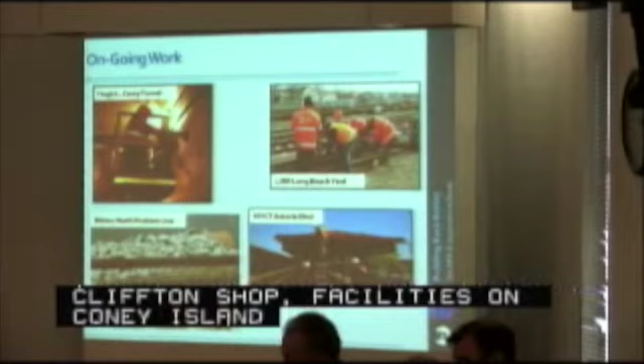Again, you'll hear more in April about specific projects that each agency is progressing, but some examples of ongoing work include repairs in 3 tubes at New York City Transit: Montague, Greenpoint, and Steinway; work at the Clifton Shop in Staten Island; facilities at the Stillwell Terminal in Coney Island; and security equipment in 6 of New York City Transit tubes. At Long Island Railroad, work is underway in the Long Beach branch and also to the First Avenue substation that goes to the East River tunnels.

Bridges and Tunnels has work underway at the Cross Bay and Marine Parkway bridges, and Metro North has restoration on the right-of-way, including stabilization of the shoreline and tree clearing throughout the system. Some contracts that are going to be awarded soon include the Beach 116th Street Station in the Rockaways, permanent power, signal and communications work, and repairs along 30 miles of the Hudson Line. We're going to continue sealing system openings to the subway system, particularly in Lower Manhattan.

At TBTA, they're preparing RFPs for electrical, mechanical, communications, lighting, and other systems in the Hugh L. Carey and Queens Midtown tunnels. We are also nearing completion of the design for the permanent restoration of the South Ferry Station.

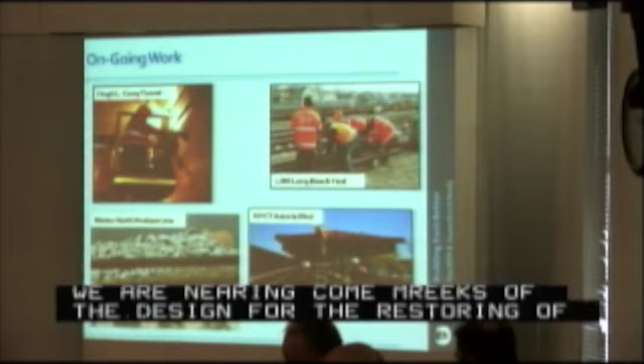Wherever possible, resiliency is being integrated into repair projects. For example, Long Island Railroad and Metro North are rebuilding substations at higher elevations, and in the Montague Tube, they are strengthening the duct bank that was damaged during Sandy. Each agency is also in the process of establishing design guidelines to allow resiliency to be built into repair projects as part of the core program.

So where do we stand in terms of money? The FTA has allocated $3.8 billion to the MTA. Almost $900 million of this is designated for resiliency work. We've executed grants for just over $1 billion with the FTA. Most of these funds are for repairs, but it does include some money for resiliency work and some also for emergency work that was needed immediately after the storm to get the system back up and running.

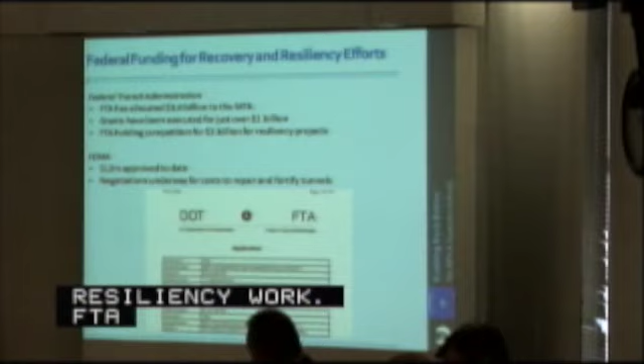FTA recently published a solicitation for a competitive grant program for $3 billion for resiliency projects. Applications are currently in development, and that program is open to all states that were under the disaster declaration for Sandy, so up and down the eastern seaboard.

The FEMA program works a little differently, and funds are allocated only when there's agreement on project scope and cost. So to date, FEMA has approved about $12 million for repairs in the TBTA system. Negotiations are currently underway for costs to harden and make permanent repairs to the two vehicular tunnels.

When we think about resiliency and how to harden the system, many of our assets by their very nature can't be physically moved. So we're taking a layered approach to resiliency that involves a couple steps. The main objective is to keep water from entering the tubes or flowing into low-lying areas. This might involve work such as what's currently underway in Lower Manhattan to seal certain openings to the subway system, or to build walls or other barriers around yards or other low-lying areas.

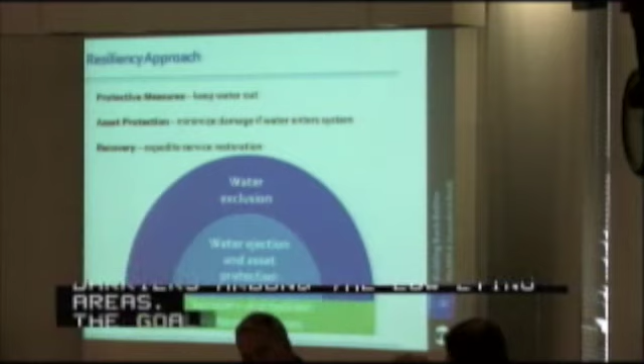If water does come into the system, the goal is to pump it out quickly and ensure that equipment in those areas is as watertight as possible. New York City Transit is in the process of converting a few older rail cars into pump trains to increase their pump capacity to that end.

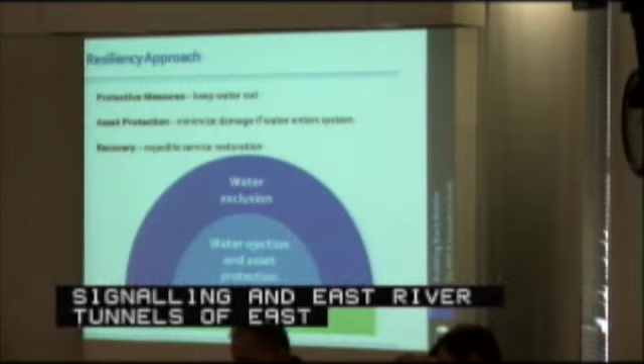The last piece of the layered approach involves projects to expedite our recovery and make systems more resilient. This might include improved emergency communications, emergency generators, and other emergency equipment, or also projects to increase the resiliency of the overall transit network, including higher capacity signaling in Long Island Railroad's East River tunnels, or the Penn Station Access Project, which allows Metro North New Haven line trains to come in over the Hell Gate line, avoiding the single point of failure of the Harlem River Lift Bridge.

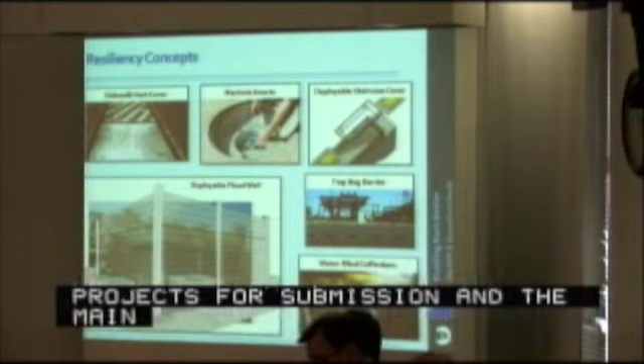So we're in the process of prioritizing our projects for submission. The main points that we're considering in doing the prioritization is the cost to repair the asset if the resiliency project is not conducted, the potential impact to customers without the project, the likelihood of repeat damage, the overall cost of the project, and also the project's role in increasing the overall resiliency of the transportation network. FTA's funding decision is expected in the fall.

On the FEMA side, resiliency principles are the same, but the work will be approved as part of negotiations for the repair project. So as part of the repair work for the Hugh L. Carey Tunnel, Bridges and Tunnels is looking at raising the seawall of the Governor's Island vent building, and that will be negotiated as part of the repair package with FEMA.

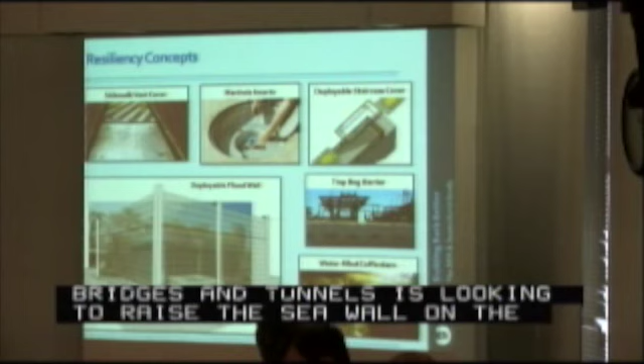The April report, again, from folks from the agencies, will include more information on which projects we advance through the FTA program and also status of the recovery.

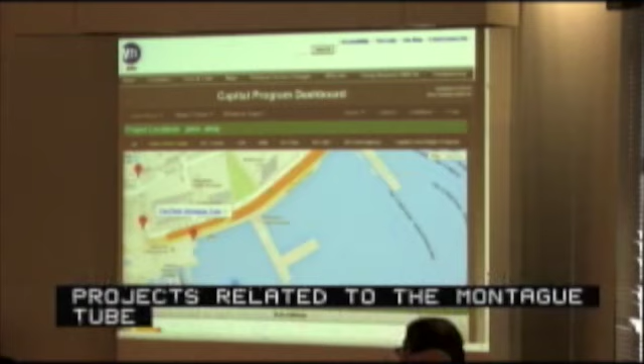What we're going to do today is, using the interactive Google Map, zoom in on one of those projects related to the Montague Tube Initiative, which is a $260 million initiative that's been broken up into 12 projects, and this particular project is the fan plant for Montague Tube. This is a $5.1 million project that was split out of a larger line equipment project.

So if we click on that, what you see is a summary of the project, a map that gives you the location of the project, and down below, design start and finish milestones, and if it's in construction, you'll see construction start and finish milestones, and then a percentage complete.

If we click on the budget history, you see the history of the project. This explains that it was created after the July amendment, taking $5.1 million out of the larger $290 million line equipment project. And if we go to the budget detail, this simply shows the same information but in a graphic form.

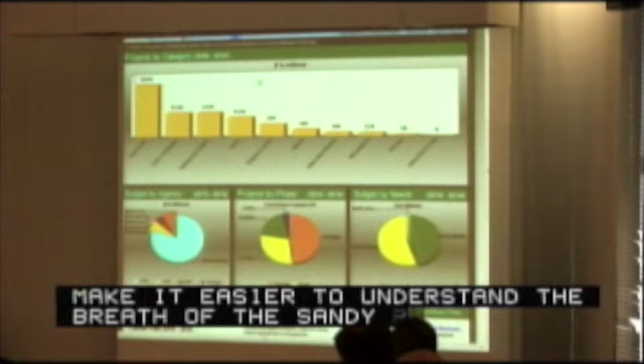Down below you see some pie charts, broken up by agency. The biggest chunk is clearly New York City Transit, in that light blue color. On the right you see it broken up by needs, primarily resiliency versus recovery work. In the center, broken up by phase: planning in orange, design, and construction.

If you scroll down, you see a list of all currently 195 projects in the Sandy dashboard. When we started out with the dashboard and the amendment, we had 81 projects. Now we're up to 195, and that number will continue to grow as we refine our strategy.

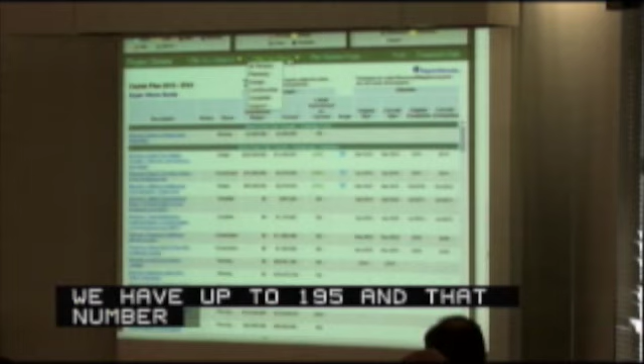That's sortable by phase, and if you look at that, you can sort by planning phase, design, construction. If we sort by construction, it takes you down to the same Montague fan plant project we looked at previously. So the dashboard allows you to go by map to your location, or sort by agency or by the phase of construction or design, and look for it that way as well.

I'd like to point out that at the top, for frequent dashboard users, we have a feedback form. Since we're on a cycle of continuous improvement, it would be helpful if you provided feedback to us on what you like and don't like, so we can make it better.

The last thing I'd like to do is point out how you get to our dashboard from our website. If you go over to the right, there's a tab that says transparency, and if you click on that, it brings you straight to the dashboard.

Today that will show you it's a site still in development, because we're going to go live with the Sandy dashboard information in a few weeks, but that's how you will get there when it goes live. Happy to answer any questions.